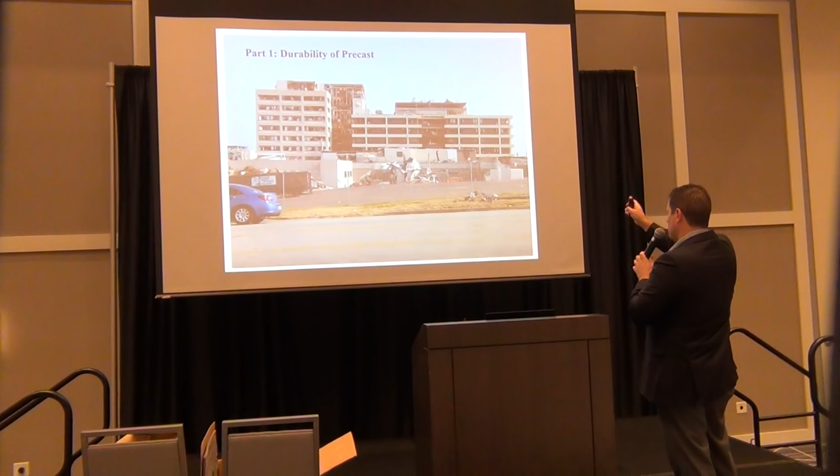So to give you an idea of the devastation in this area, I was standing here with my point-and-shoot camera, excuse me, I'm gonna put my back to you, and I took this picture from across the street, and then I turned to my left, which would have been this direction, and this is what I saw. That precast building was literally the only thing standing up in the area, and the devastation was so significant, it was indistinguishable whether it was a commercial or a residential district.

So when they went to replace it, they started with the one thing that did work, which was architectural precast on a steel frame. Here's what they did differently. Instead of the big expanses of glass, they used, generally speaking, smaller punched openings.

They tested a glass that could withstand 250 mile per hour wind loads being set into the precast with embeds that helped to secure that glass. The idea there was that the glass wouldn't be the first thing to fail, like what happened on the last project. All the egress areas were all precast.

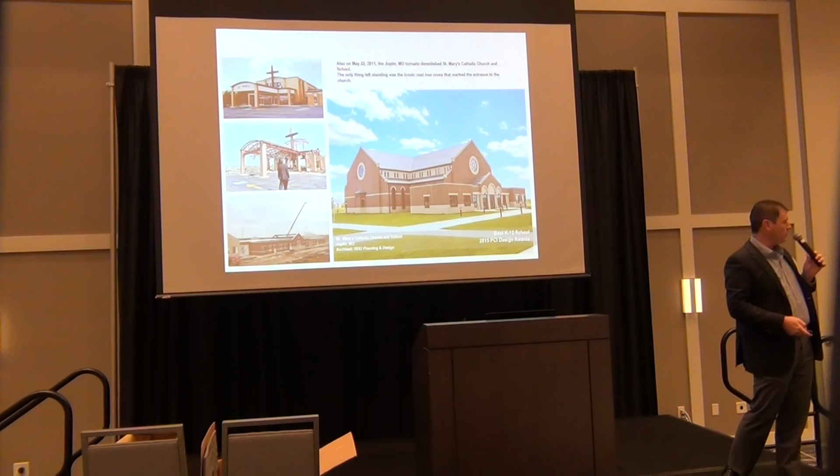This was their groundbreaking ceremony. They were in a big hurry to replace that church, and the private school next door. So they wanted precast because of the speed, for the durability. They wanted people to feel safe there, but also they had a very specific look that they wanted. It was a traditional Romanesque look.

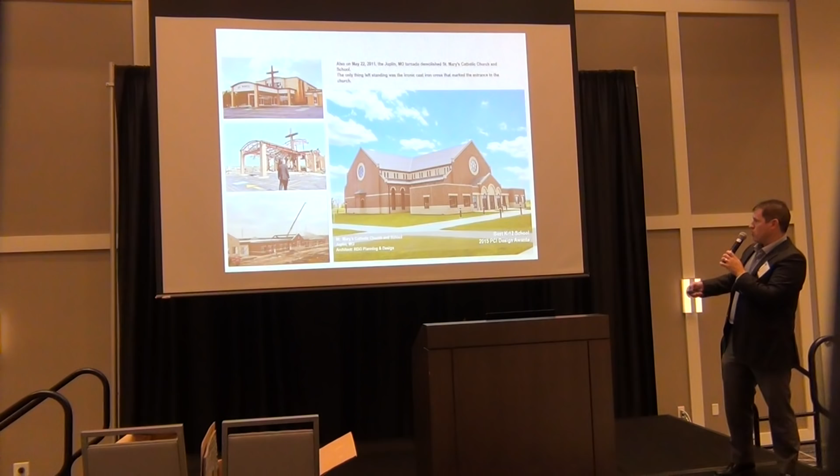So that was at the base of the church. There was some form liner work. That's actually exposed precast that was achieved with a rubber form liner.

And thin brick. And then that's the main church. I'll tell you a lesson learned on this project, and you can probably guess by looking at it, that would be the joints. We were not involved in the caulking. That was another trade, but to me, what was unfortunate is that they chose such a light color. I think they were trying to match the exposed precast, but if they had chosen a gray, dark gray, or even a red, I think it would have popped less than what those joints do on that project.

It's still a nice looking building. We're still very proud of it. But that was one lesson learned. That's the durability of precast.

Who's ready for some meat and potatoes? Anybody? 2 people? All right. 3. I'll take it. Let's go.

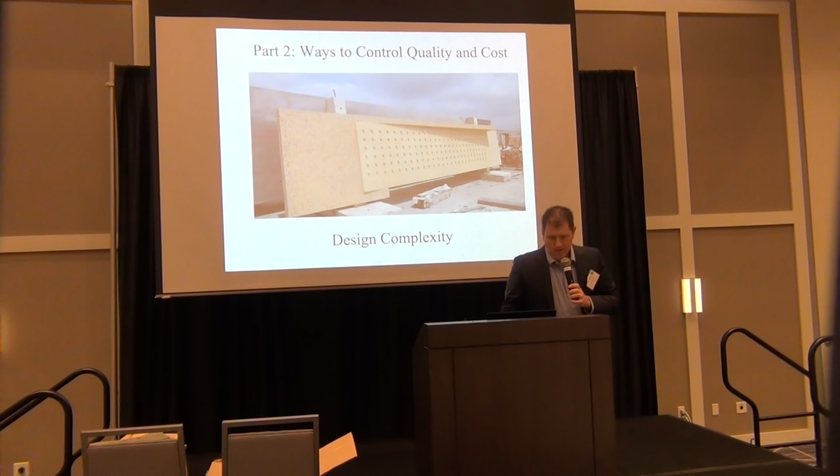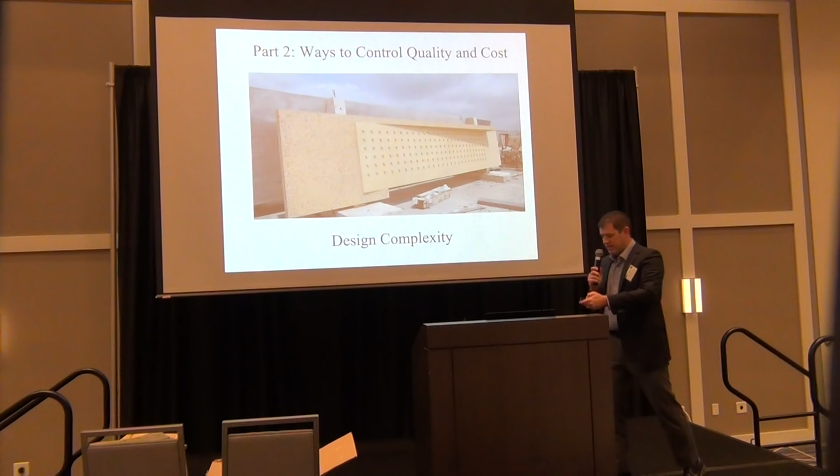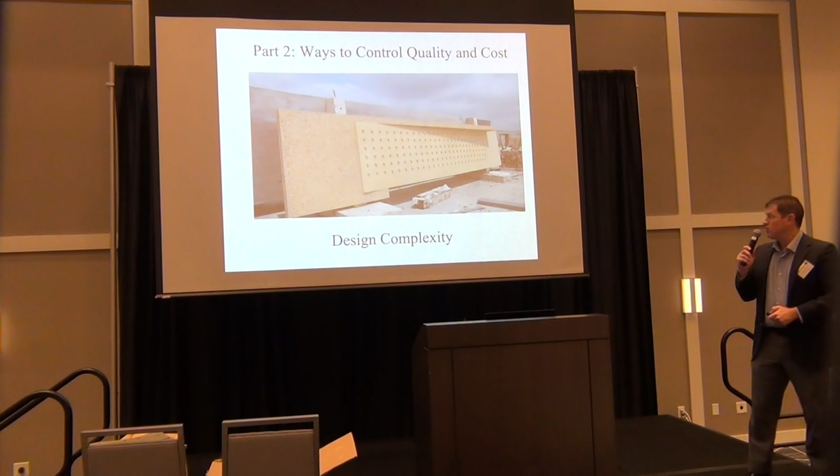Some nuts and bolts ways that you as construction professionals, especially if you're involved early in the design, can control quality and cost. Here's a panel with a lot of things going on. It's a pretty complicated job, about as complicated as the one you and I did last time, Kevin, in terms of the panel complexity. But there is an exposed aggregate finish, there is an acid etch finish, there's things going on in 2 different planes, there's a curved lip, there's a grid pattern, lots of stuff.

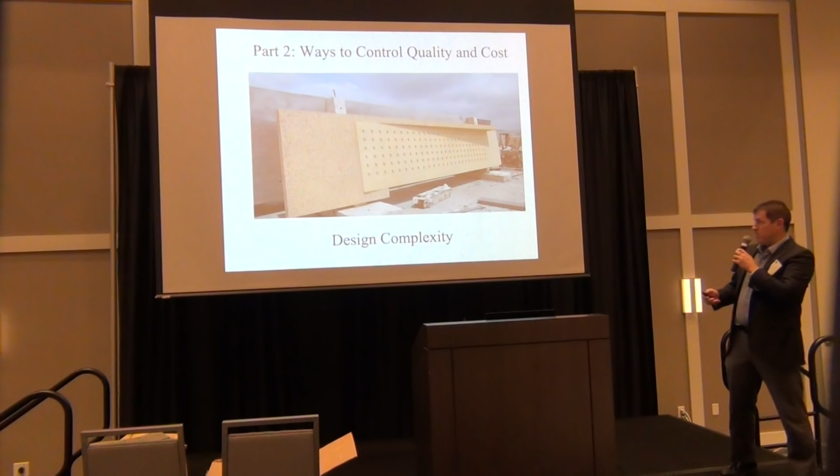What takes something like this and makes it more cost negotiable is repetition. I can't overstate what a big deal that is in the precast industry. On an efficient job like this, with a form liner that we can use again and again and again, form work is only about 3 to 4% of our overall cost, and that's our precast cost. So I would make the persuasion that you spend the money, and if you can find some creative ways to repeat, then that is one way to save a lot of cost.

And that repetition can go for a number of factors, for pieces, for form liner work. If there's a way to strategically make that form liner repeat and still make it look random, if that's the goal. Whether it's pieces or not, it's not a big of a deal because we can take our side rails and move them in and out, but there is some efficiency with the size of pieces when we repeat those.

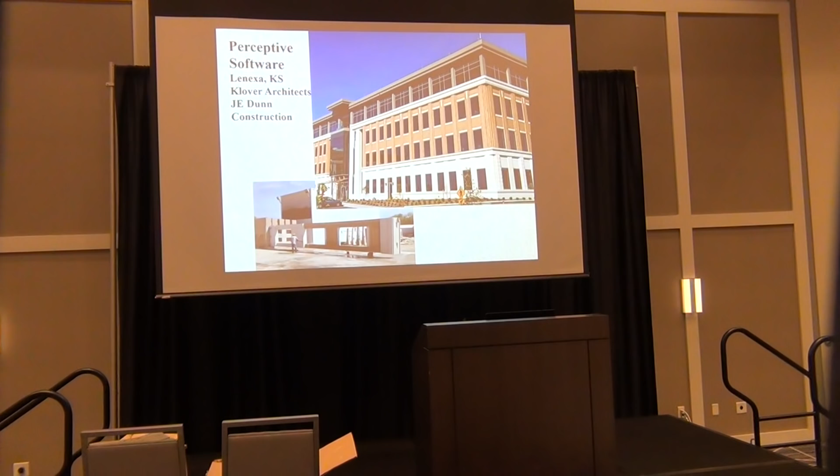And you see a lot of bump outs, some thin bricks, some reveals, a lot of things going on, but because of the repetition, this was actually a very schedule and budget conscious project. And we cut the pieces by about 80% by going with those large pieces with punched openings. So that was a huge saver on that particular project. It doesn't always work out because people don't always have that kind of flexibility with their window size and their window locations, but it did work perfectly on this one.

Some things that we suggest for working with precast. One is to get a precaster involved as early as possible. Sometimes that's when the designer's using a big fat Sharpie marker and deciding what materials they're going to be. Sometimes the CM will give us a bootleg set of CDs and say, hey, we're going out for bid in 2 weeks. Can you kind of give this the sniff test and see if there's anything glaring? Obviously, there's not as much we can do when we get involved that late.

Usually it's somewhere in the middle there, whenever the team feels comfortable engaging us. Sometimes that's the architect. A lot of times it's the contractor if they're very savvy on their precast procurement and savvy about budgeting and that sort of thing. Speaking of budgeting, the more information we can get, the better. And some of these may not even be questions that you know the answer to, but one of the first things we're going to ask is, is it an insulated panel?

Is it a non-insulated panel? Is it going to be a load-bearing panel? Or is it going to be clad onto some kind of structural frame like steel or cast in place? Is it going to be an integral color? Or is it more of a warehousing thing that's going to be painted in the field? Or will it have thin brick, thin stone?

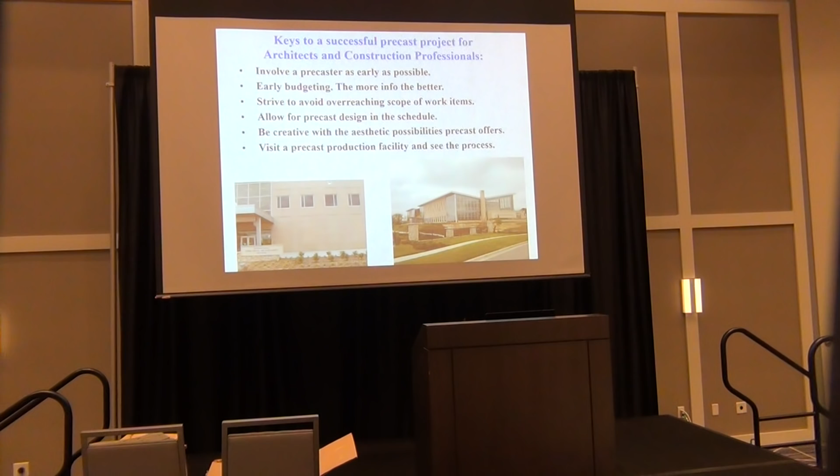And a little bit about schedule. When it comes to precast, we do all kinds of projects. We do hard bids, read them and weep. We do negotiated. We do design build. We find ourselves being pretty big fans of design build for a lot of reasons. One challenge you have with precast is getting into their schedule. And some precasters book out a little further than usual.

Typically, if you have an empty plant, it's going to take 4 months to get precast because that's how long it takes to get through the shop drawing process, the engineering process, the sampling process, and then to start production, and have enough pieces produced to get it out to the job site. And you've got to be at least 80% produced because once that crane gets out there with the union workers, you've got to feed that monster, make sure they don't have any gaps in their schedule.

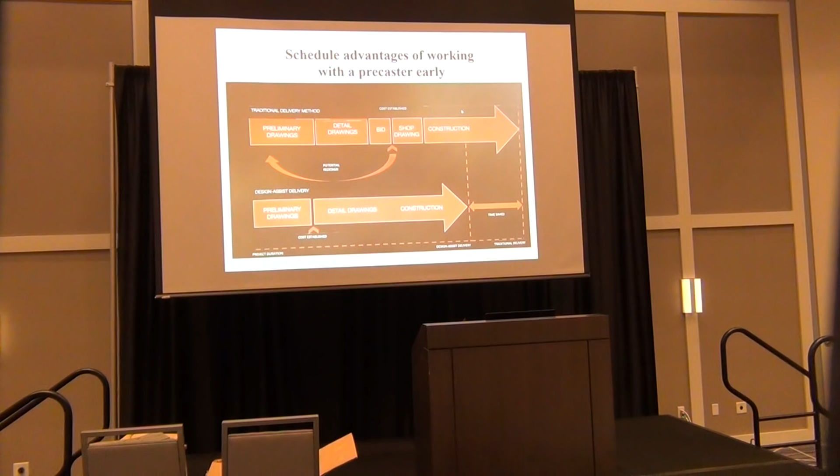But a few questions to ask. There are some precasters that are very loose, and when they're doing wall panels like this, they won't even figure the punched openings in there. They'll just throw that cost in there. We're a bit more precise than that. We will subtract out the punched openings when we're doing a project. So that's a good question to ask, just to make sure that their takeoff process aligns with yours.

The other thing that causes a little bit of confusion every once in a while is there are some precasters that, when they figure square footage, figure it based on the square footage of finished product. So that includes maybe a little bit of return back where that window is, where the precast is tucking back, and you've got another 6 inches or so of finished area. So that's a good question to ask, and if you want the precaster to take that number and qualify it to just the amount of flat panel, they should be able to do that for you.

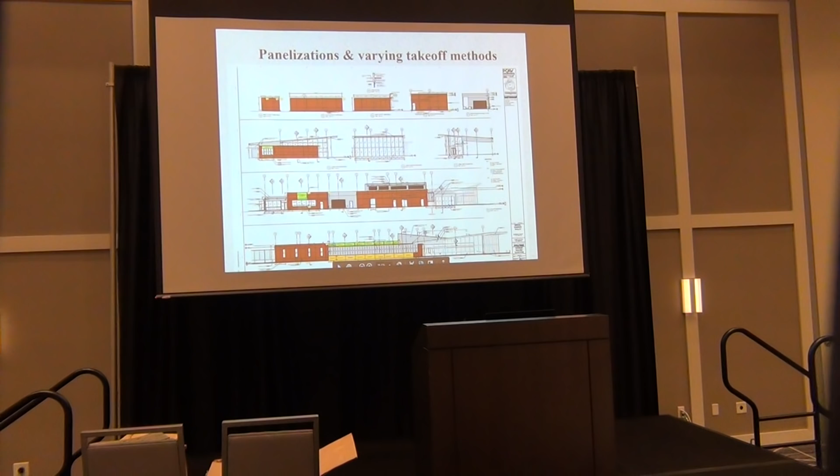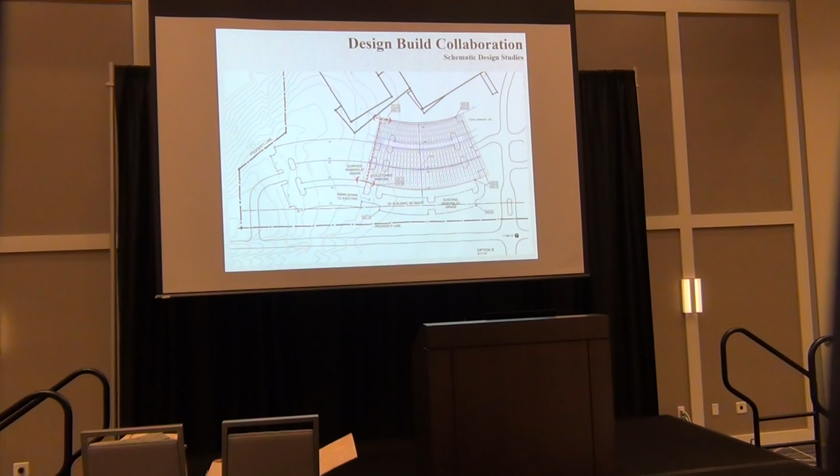A couple of VE case studies. This was a parking structure. The design came in. None of us have ever had this happen on any of our jobs. It was over budget. The owner asked for a VE exercise. This was kind of in the early days of BIM, when BIM had a little bit more wow factor.

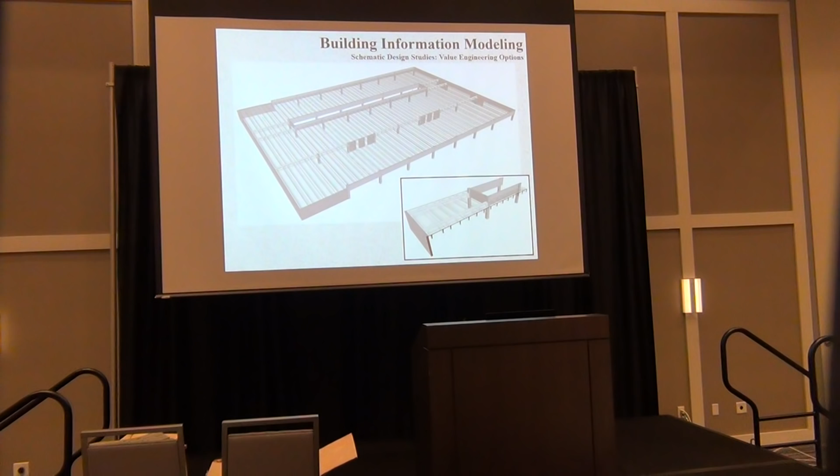Now everybody uses it, but we looked at some ways to make that thing more efficient, make it a little more boring. Realized we could save about 18% of precast costs just by straightening. Now, that didn't end up being that much, so sometimes it's just a justification for the owner that, you know, it's really not that much more expensive than what they had before, but they have the satisfaction of running the traps.

One of the most successful VE stories that I've been involved with, it was with my last company. There was a design build competition. The team that my company was on won that competition. When they got the job, they realized that it was $1 million over budget. It was a $12 million parking structure. So usually when you have to take some money out of a job like that, you've got a little bit of wiggle room.

But in this case, they said, well, we've got to have this many parking garage spaces because it's in the program. You know, they need this retail space because that's in the program too. You know, we sold this brick design and this architectural look. So basically, we just need to do that. We've got to figure out a way to do it $1 million cheaper.

And I'm not exaggerating. So the contractor, the precaster, the structural engineer, and the architect locked themselves in a room for a day. They came up with a gentleman's and ladies' agreement. They were going to check their egos at the door. All ideas were on the table.

They started looking at it and realized with the floor plate, instead of going with a 10-foot double T, if they went with a 12-foot double T, they could actually spread that out and have fewer pieces. So that was fewer columns, fewer beams, fewer floor slabs. There was some savings there. Then, with some review of the codes, it was discovered that you only needed 3 stair towers in this building. So they eliminated one of the stair towers at the far end of the building.

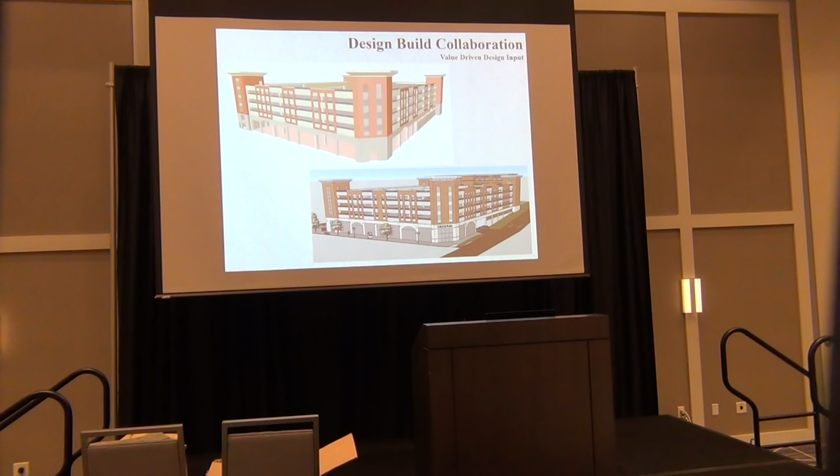The other thing that they did is they realized there were some areas where you had precast on top of precast. So you had structural precast with some architectural gingerbread on top of that. And so by combining those into one component, they saved. So at the end of the day, that one-day exercise, they ended up saving that project $900,000. And it was a successful job. I should have a little asterisk here and say results not typical. That was a good day.

Some other recommendations. Oh gosh, the sound didn't work before, but it works now. Hang on just a second. There we go. Much better. Everybody doing all right?

So we encourage a PCI certified producer. The Precast Prestressed Concrete Institute has a certification program. That means that producers get at least 2 unannounced audits per year by independent inspectors. They come in, they check the reinforcing strength, the curing strength, the quality, the finish capability, safety, all those kinds of things. It is the largest, most stringent, and widely accepted regulatory agency in the precast business, and I would say probably 85% of the producers belong to PCI.

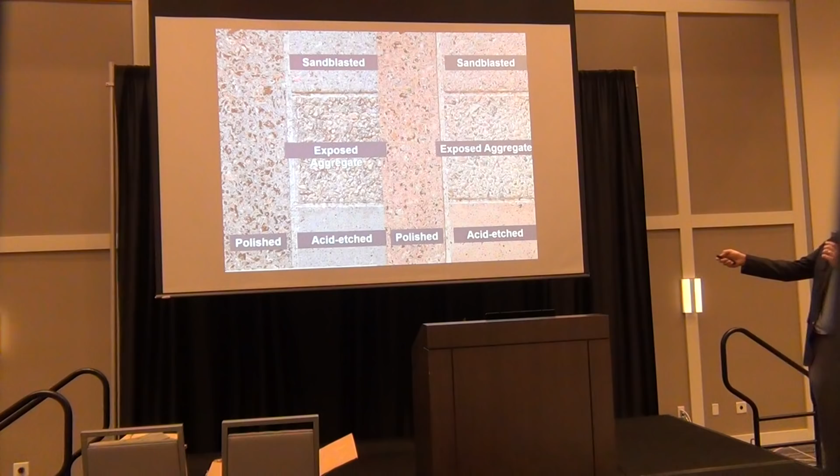Then they have the exposed aggregate, the rough rock look. The first time I ever saw one of these samples when we got in the industry 15 years ago, I thought, 1970 called, they want their finish back. But as I got into it and looked around, I realized this is done quite often, usually on the base of the building. And then there'll be a transition with a reveal, and you might see sandblast or acid etch up above.

And polishing we don't see so often. That requires a specialty polisher to come into your plant. While it's very common and easy to do on floors, on vertical surfaces it's a little bit different animal. So we get some interest in that for samples, but it seems at the end of the day, it's pretty rare people want to spend that money to do that.

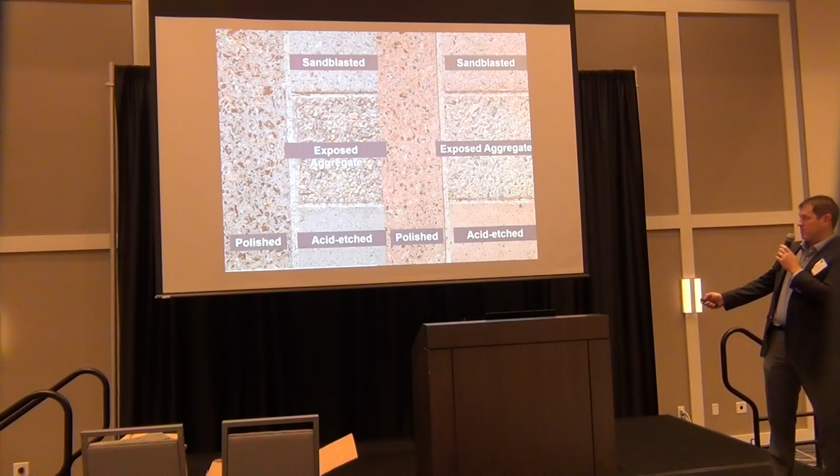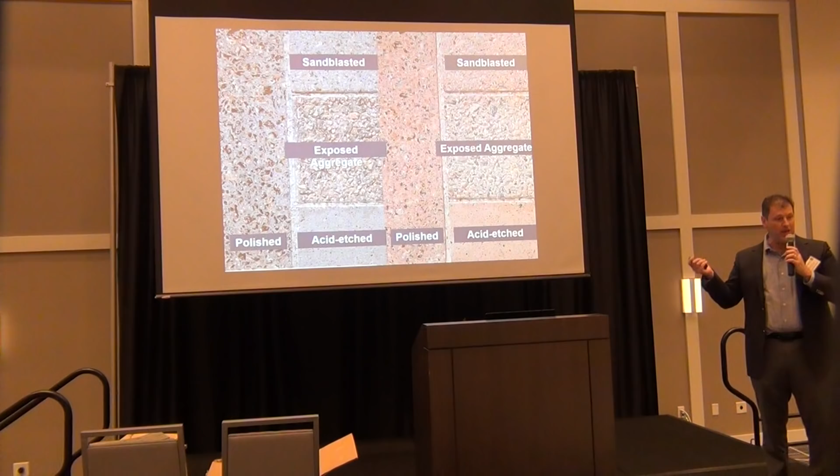But one way to save money: this is one mix design, this gray. This red is one mix design. You can divide your wall with reveals and you can distinguish with texture instead of distinguishing with mixes, and that saves a little money. We can pour more than one color, more than one mix design in the panel, but there's a cost for that because we're essentially doubling the risk that something will go wrong with one of the two mixes.

And then there's a new finish that we do called a distressed finish, where we throw something down, and then a powder that we throw down in the bottom of our production bed, and it gives it this veiny, distressed look. Well, if you break that up with reveals, it has a look of natural stone and travertine, but for literally a fraction of the cost of doing a natural stone job. So that's something that we're starting to see some interest in.

For precast samples, something that we encourage doing during the sampling process, whether it be with the designer or the contractor or whoever, is actual samples.

In this particular project, I thought, I know Brian, my friend and competitor from Coreslab here, I thought he might be here today. I'll tell a story about him. He won't mind. Is he? Oh, I know he's here. Anyway, I've told this story in front of him before. He won't mind.

So basically, this is a little bit different project. I'll tell you what, I'll tell the story first. It may seem like if you're working with one precaster and they're doing all your samples, you're giving them an advantage. And that can be the case, but it's not always the case. A few years ago, I was working for a different producer. Brian was working for Coreslab.

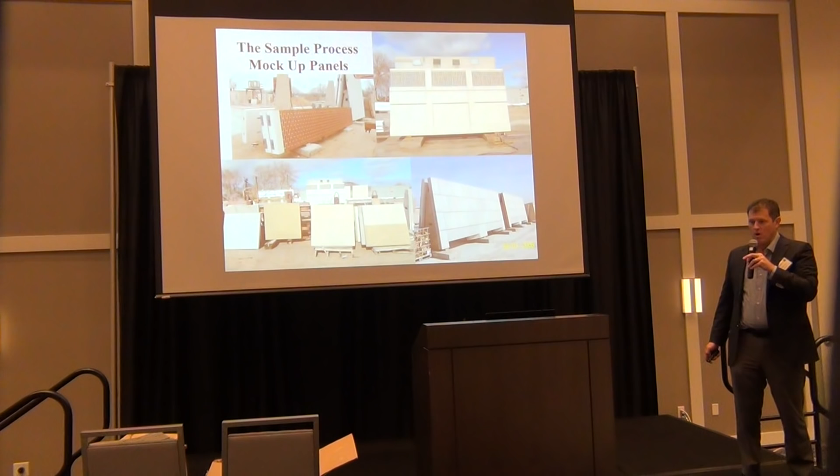And then of course, mockup panels. They're great because you can show not just a larger portion of what the sample's going to look like, but you can start to get into what the reveals are going to look like, the transition from the thin brick to precast, the height of the reveals, the depth of the reveals, that sort of thing. So the architect's obviously always involved in that process. We like when the owner gets involved, usually. And just everybody's talking about those expectations up front.

Anybody falling asleep? I might be. I'm going to throw some stuff at you guys. Nobody's thrown anything at me yet, so. This is like your mid-afternoon wake-up call. Nobody's sued me yet, so I'm going to keep throwing stuff. I broke my arm last year. Throwing's a little bit weird for me now. I made it back to the cheap seats. Almost. I got some paper too. I got some paper, pens, stuff like that.